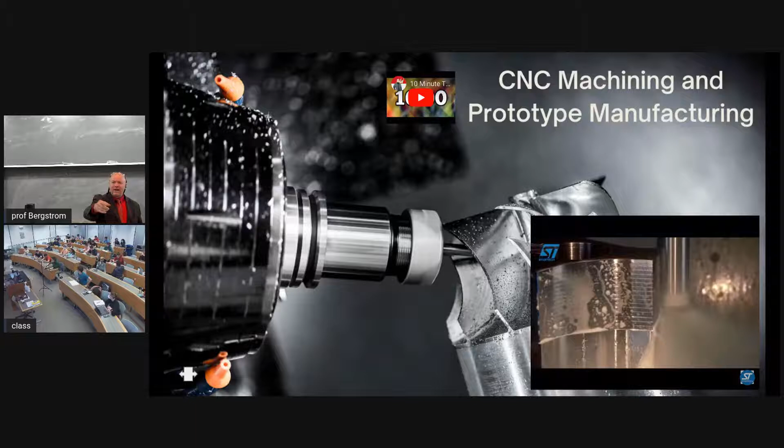We need some. So, you're the one that ran on the track last time to get ready for class. Oh, sitting in front of you, who's not here now. Must have drowned. Who ran on the track to get ready for class? Talking to his neighbor guy, not even paying attention to me right now, totally not even paying attention to me right now. So you're the one that runs on the track to get ready for class. Did you do that today?

You did this morning before lab. Was it wet? It was, yeah. So I was laying in bed at 3:45 this morning, listening to the rain, thinking, well, I'm not going to go back to sleep. And I'm not going out there.

So I'll turn on an audio. I did the Audible Plus thing or whatever, so it's like $14 a month and you get one thing plus whatever they give you for free. The title of the book was The Reluctant Druid. It's some guy that gives away his books for free on Audible, because I don't get another credit for a couple weeks. I'm still listening, I mean not right now.

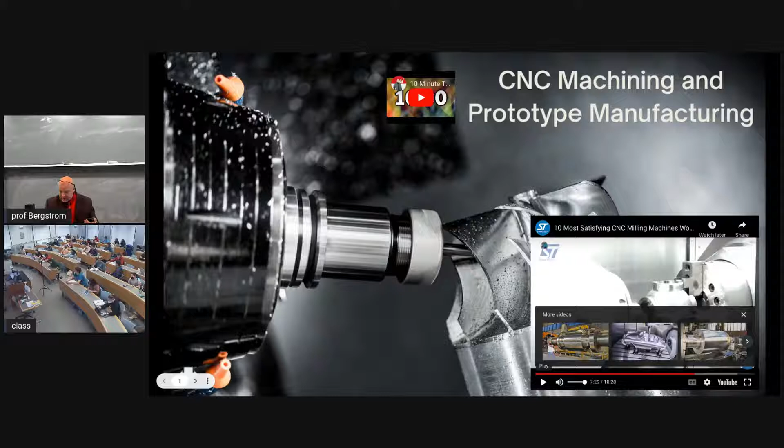This was a song to get my blood flowing. But now I'm gonna just make sure that we're live on YouTube on my channel before I do this, because I have had many times where people can't hear the lecture, the video is too loud. I'm gonna do this video that you guys can't hear because we can't hear it in the room. But I think I stopped all that. There, they're gone. So obviously the audio works, because somebody else was having trouble hearing the lecture because the video was too loud.

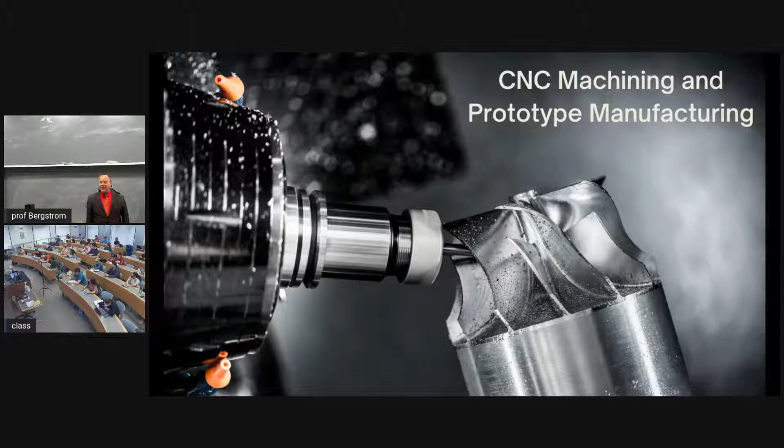I'll put these away. I don't like podiums. I mean, they're cool if you guys are shooting at me, right? But I haven't had a death threat in a while from a student. And they're cool when there's people in the back of the room giggling, when I'm walking around and there's people up in the back giggling, and I got to wonder why are they giggling. So I go behind the podium and check my fly. But that's the only reason I like podiums. I'm sorry this room has such a big podium. I'll try to ignore it, but also try to stay on camera.

So, CNC machining and prototype manufacturing.

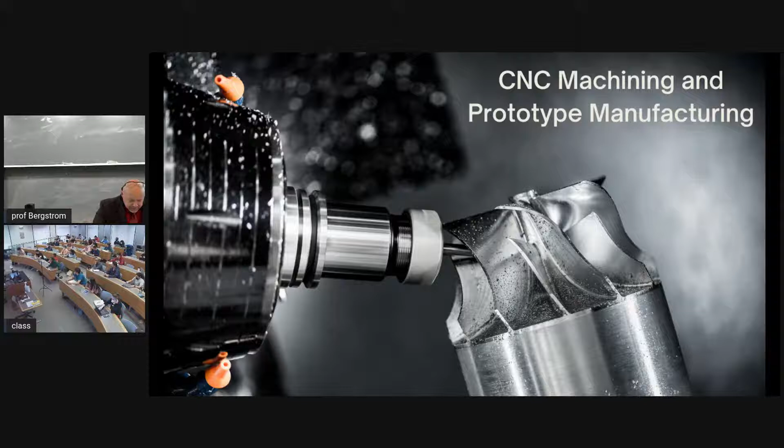First off, for the class, why? It is really cool. And your shirt doesn't have your name on it. You promised. It's in Japanese. Instead of saying Prior Waskin, it says Pudaya Wasikin. But don't worry, I got another one on. You know, Heroin Kid used to be my favorite ME1800 student, but you're running a close second now. Someday ask me about Heroin Kid.

It is cool. But all right, so the lecture title implies two things, right? CNC machining has three things, right? CNC, machining, four things: prototype and manufacturing. So we're going to talk about four things today. There's only 40 something minutes left, 42 minutes or so.

All right, so first off, what the hell is CNC? That's the first thing on the list. What is it? Computer numerical control. Computer - oh, this is good chalk. I've never said numerical, I always just say numeric. But what the hell does that mean?

The kind of machining we're going to talk about is material removal by large chip formation. Now the chips we're talking about are a few thousandths of an inch thick and maybe a few hundred thousandths of an inch wide. So large is a relative term here. But material removal by small chip formation is things like sanding.

Who's used sandpaper? Most of us have. The little bits of material that come off when sanding are chips. They're formed exactly the same way as the chips in the machining processes we use in the mills and lathes in the lab, except on a piece of sandpaper there might be 10,000 cutting tools. In a turning operation - who knows the difference between turning and milling?

You do, what is it? Turning, you have the material being spun, and milling, the cutting tool spins.

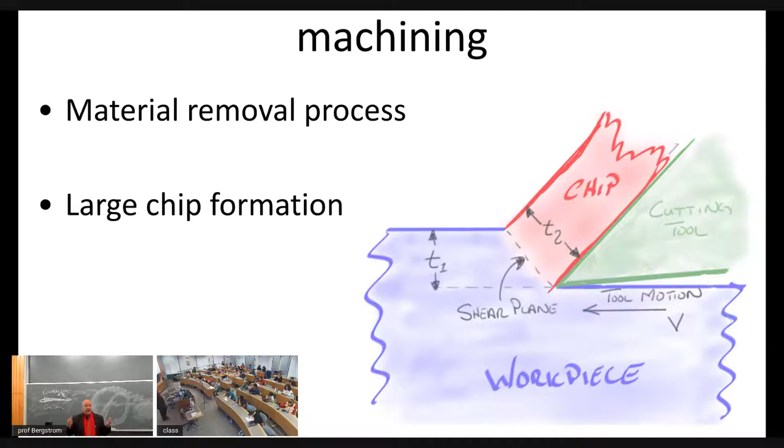Right. So in turning, the workpiece rotates, spins around, and the tool moves in and out relative to the center of the workpiece, and moves along the axis of the spinning workpiece. So with a turning operation, you can make axisymmetric parts. Who's had a CAD class, like Introduction to Drawing 1310 or whatever we call it? In that, you do a revolve operation in the CAD software - you make an outline and revolve it around and it makes a part appear. So parts made using a revolve operation, you'd typically use a turning operation to carve away the material that isn't part of the part. So that's turning.

In milling, the tool spins and the prismatic workpiece moves relative to the tool, or the tool moves relative to the prismatic workpiece. It's really the relative motion between the tool and workpiece that matters.

So in the diagram we have here, if I draw it on the board: we've got workpiece, chip, tool, more workpiece here, and somewhere in here, that's the chip. This is the workpiece. The cutting edge of the tool is right here - we're looking down the cutting edge of the tool in this diagram, right along that edge. The workpiece is moving that way relative to the tool, or you can say the tool is moving that way relative to the workpiece. That's how all chip formation works.

Who in the room has done chip formation before? Who in the room thinks they have not done chip formation before? Nobody's willing to be brave. You're thinking maybe not? Or he's willing to wave his hand but not quite raise it.

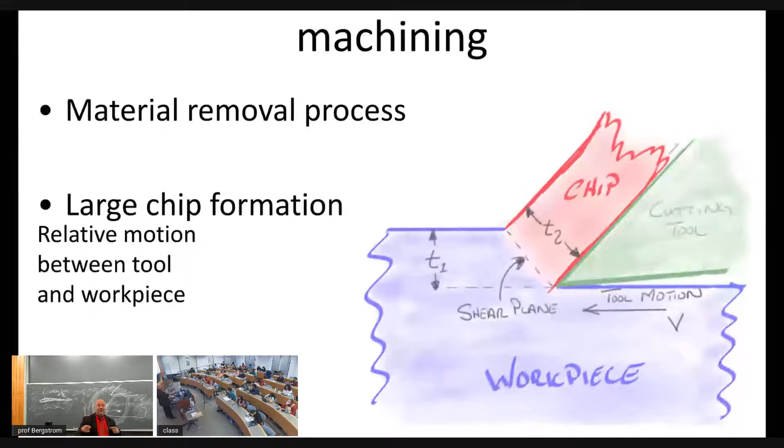Yeah, we said that - it's written on the thing. See, I told you the slides do line up with the things I say sometimes. So here's zoomed in on that.

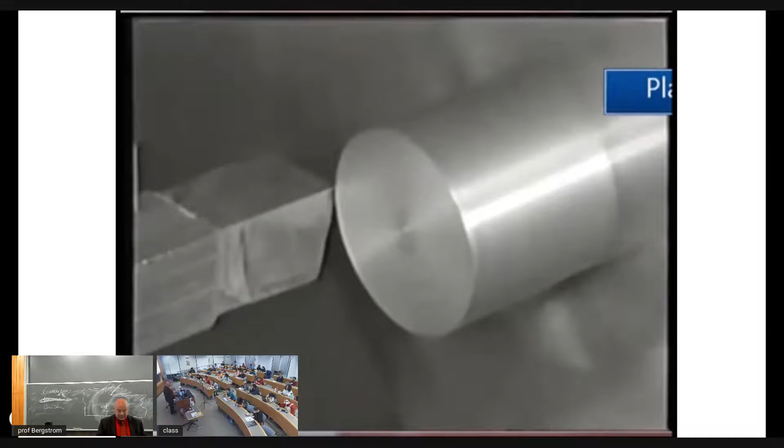So this right here is the cutting tool. We're doing a turning operation - you can see the workpiece turning. We do turning operations in the lathe, and milling operations in the mill.

Some people call turning 'lathing.' That tells the rest of us they're like a kid with CAD - they haven't learned the technobabble. So call it turning, even if others call it lathing. You'll be the smart person, and at least you will know that.

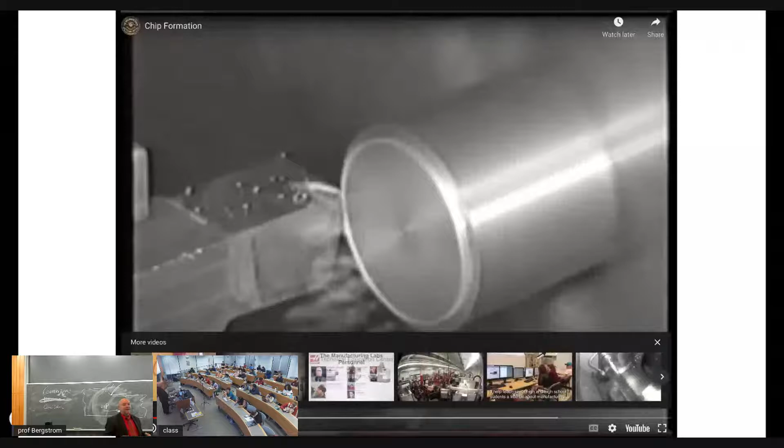So in this case, we're turning the face of the workpiece. The end of the workpiece in the lathe is always called the face. We're turning the face of the workpiece, and we're reducing the length of the workpiece.

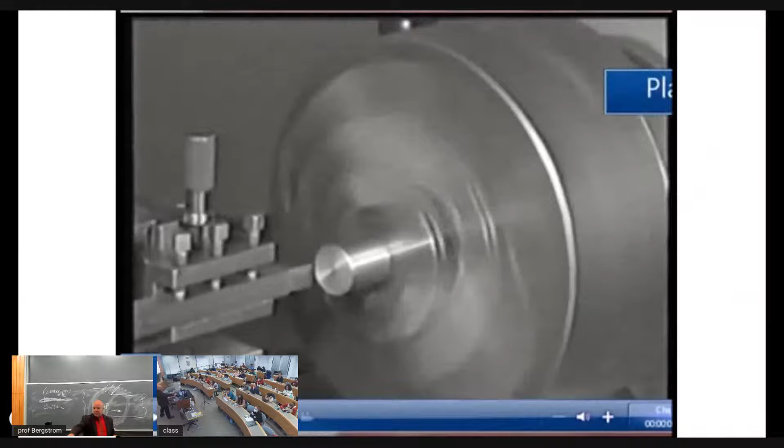That wasn't what was supposed to happen - let's try again. All right, so we're turning the face of the workpiece. The bit that's spinning around, holding the workpiece, we call the lathe's chuck. The bit that's doing the cutting, we call the tool.

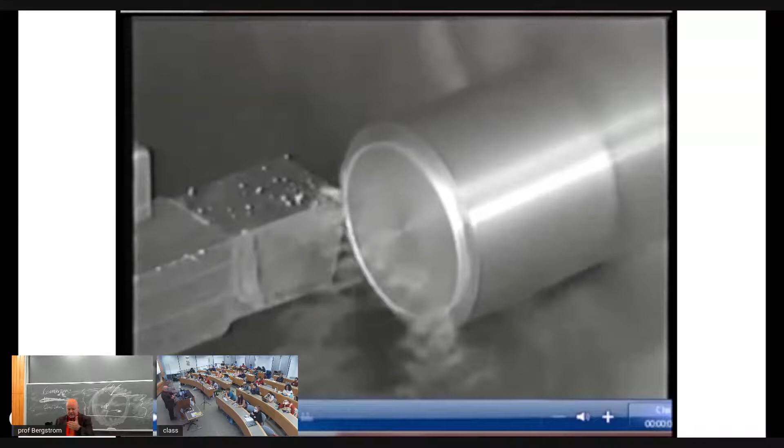So the tool's feeding across the face of the workpiece. In a second we're going to zoom in. There we are - we're zoomed in on that operation.

You can see the workpiece moving past the cutting edge of the tool. Some of the workpiece is sliding up the edge of the tool, and some is going past the tool. The bit sliding up the edge, we call the chip - a few thousandths of an inch thick and a few hundred thousandths wide. The width has to do with how deep you put the tool into the workpiece.

Next week we'll look at that region right where it stops being workpiece and starts being chip - that's important, that's where the shearing happens, where individual grains of material slide relative to each other, and it's starting to do that. We'll talk about the energy there. But anyways, that's turning.

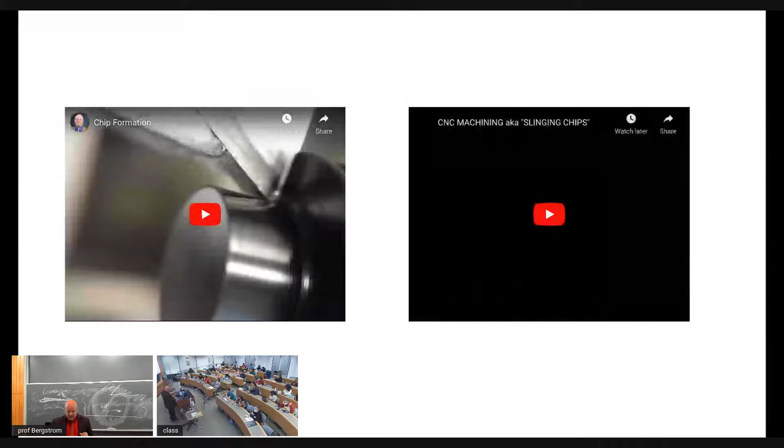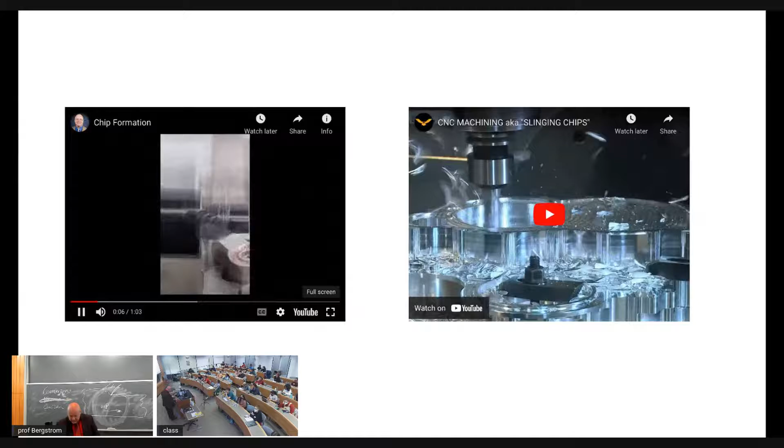Let's take another quick look at turning with a different view. Can you guys see that? Kind of - I'm going to zoom in. I think people at home can see that too. Okay, so you can see that. So that's the tool.

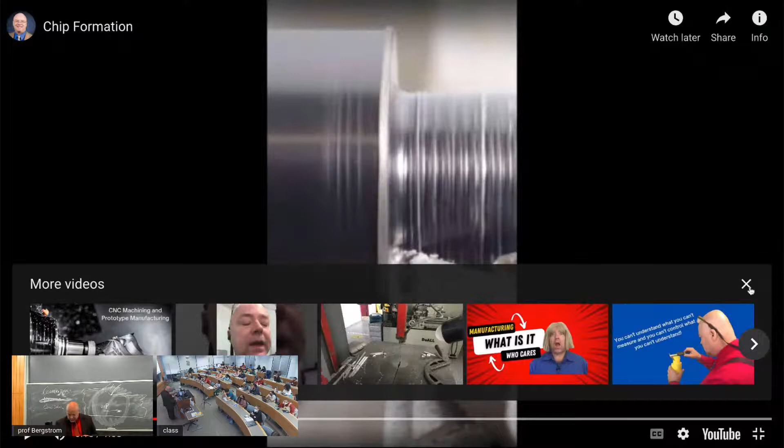In our turning operation, this top of the tool is called the rake face of the tool - that's going to be important to us later. This is an outside diameter turning operation, and we're feeding through the workpiece.

And here it goes - turn on the feed. There it goes. That chip forms right there as it goes across the top of the tool. Ready to go. Stop.

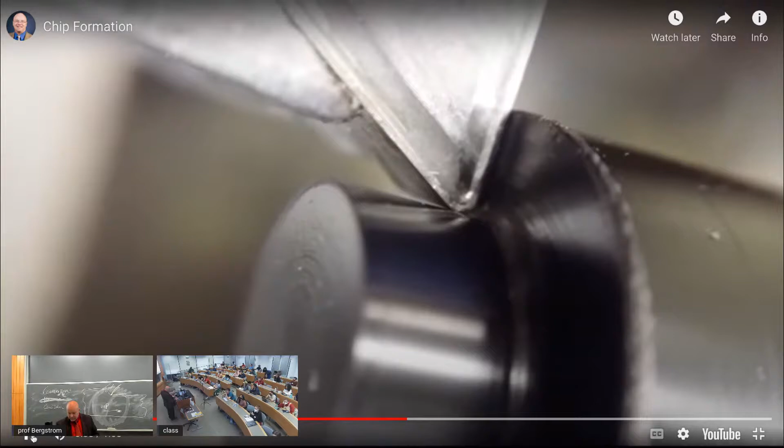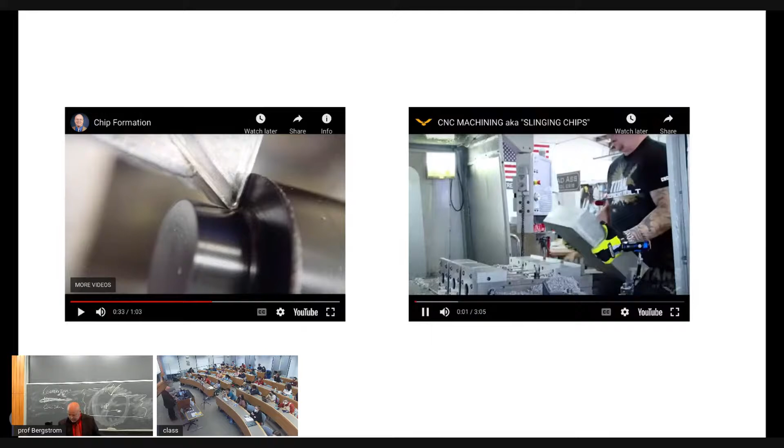And here's the milling operation. The physics in a milling operation are the same - it's still the cutting edge of the tool passing through the workpiece.

This wasn't the best video - here we go, now it's milling. This particular tool has, I think, 4 cutting edges. The tool is rotating, and then it's feeding sideways through the workpiece to make the shape. So this is a milling operation. Milling operations tend to make prismatic shapes, stuff you can clamp in a vise and hold onto.

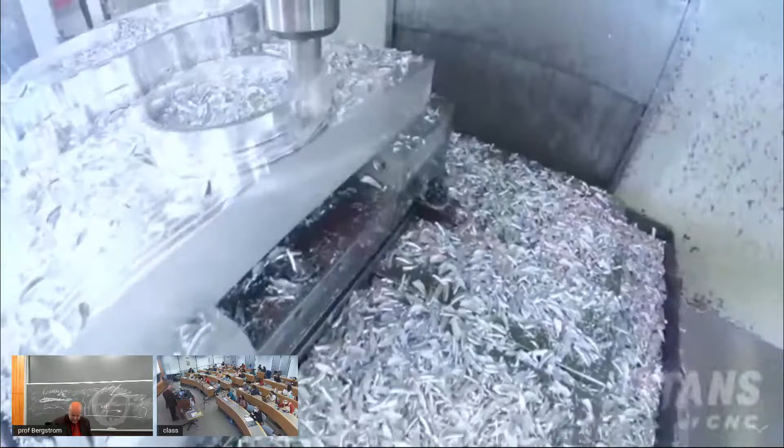And so again, it's material removal by large chip formation.

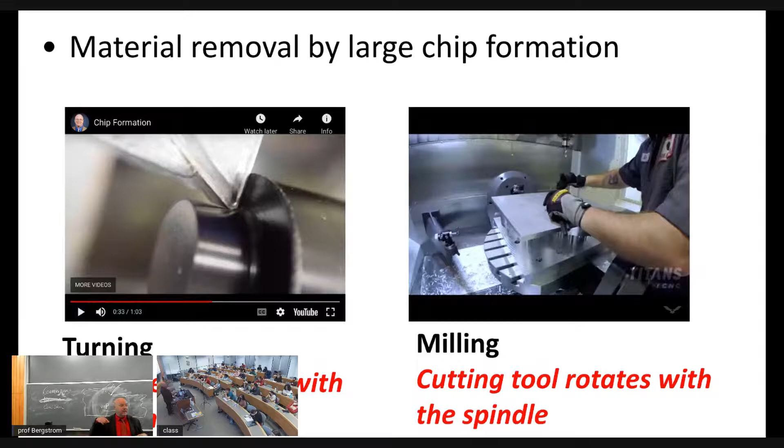Wow. Did anybody just watch the recording of last lecture before starting? Like I did. Oh, by the way, if you watch these videos later, I recommend 2x speed - it's way better than regular speed. And if there's something you think you missed, you could always go back and slow it down.

I said 'oh, wow' because I just looked at my watch and saw what time it was, and it was exactly the same minute of the hour that I got to this point in the last lecture. I took a totally different path in the last lecture, but at this moment I said, good.

We have 10 minutes left to talk about prototyping - CNC manufacturing and prototyping. So what is prototyping? And why is it important in manufacturing?

Prototyping is where you build test pieces to figure out: can I make it? You can think you know you can make it, but you don't really know until you've made it. Does that make sense?

The other reason we use prototyping is to see if we can do the manufacturing process we want to do. What's manufacturing again? It's making stuff with the intent to sell it.